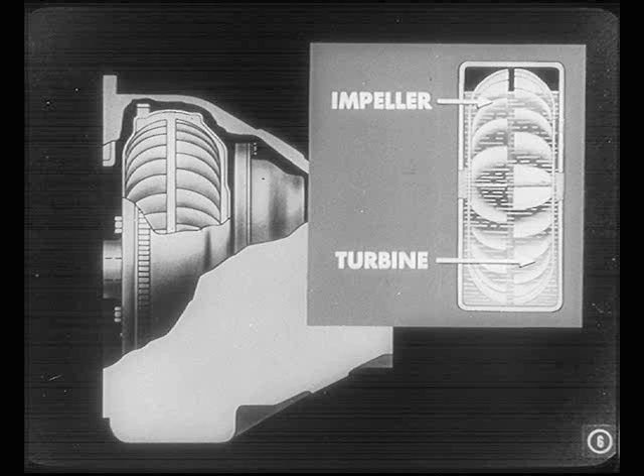You know it has a driving member called an impeller and a driven member called a turbine. Both work in an enclosed oil bath. Well, I know that, Ed. Those two units of the fluid drive work like a couple of electric fans placed face to face, with one of them plugged into an electrical outlet.

That's the idea. One fan blows, the second fan turns with the airstream from the first fan. It transmits power without gears. That's the principle behind fluid drive.

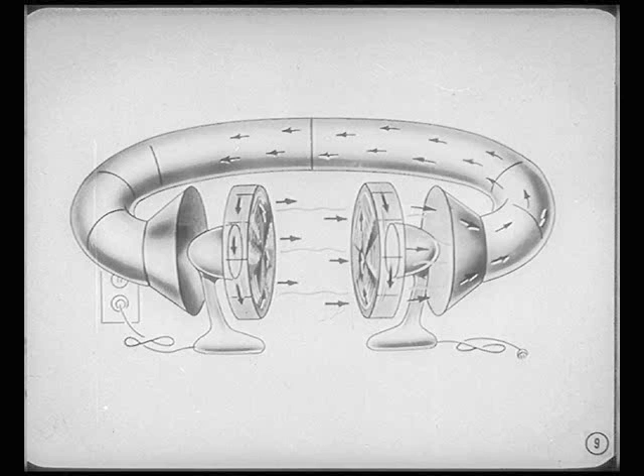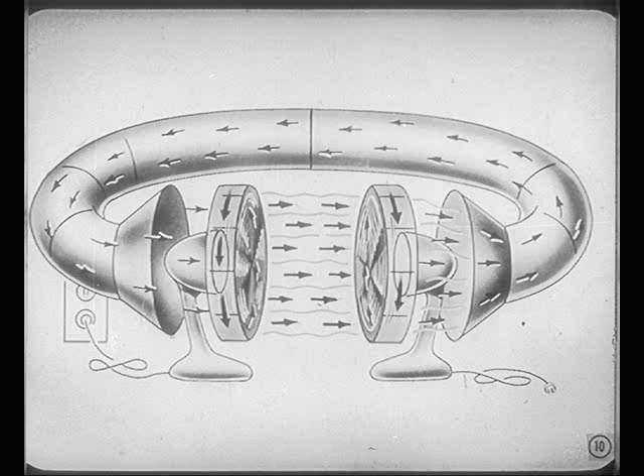Now, suppose you grab the air that's normally wasted as it leaves the second fan. That air's still got a lot of push in it, and suppose you piped it back to the first fan, so it would blow against the blades of that fan so as to help the motor driving it. The fan would then blow more air than it normally would with just the motor driving it.

Since the second fan would have more air blown against it, it would show more turning effort than the motor puts into the first fan. That's torque multiplication, or conversion.

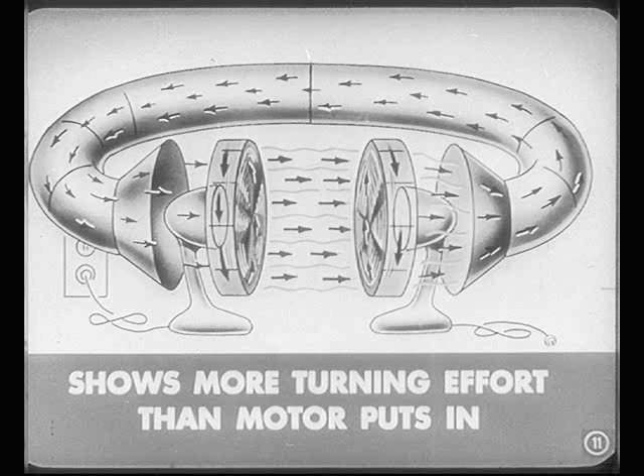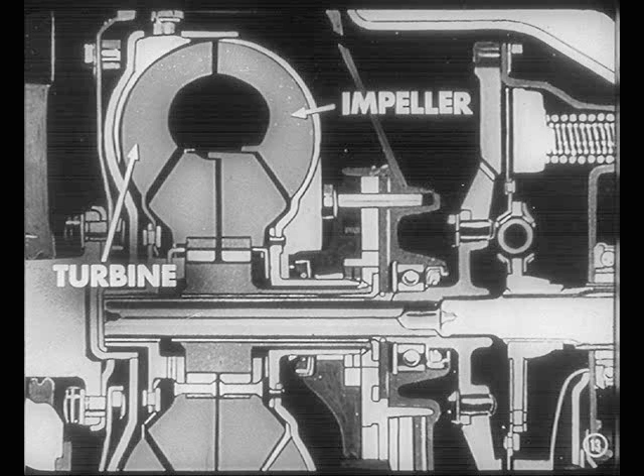I see. Fine. Now, getting torque multiplication from a torque converter just means recirculating the oil to get all the use out of it. You see, Al, after oil from the driving impeller forces the turbine around, it surges back toward the impeller. The oil has a lot of push left in it, and where the torque converter differs from fluid drive is in these two stators, or guide wheels, assembled between the impeller and turbine right at the hub.

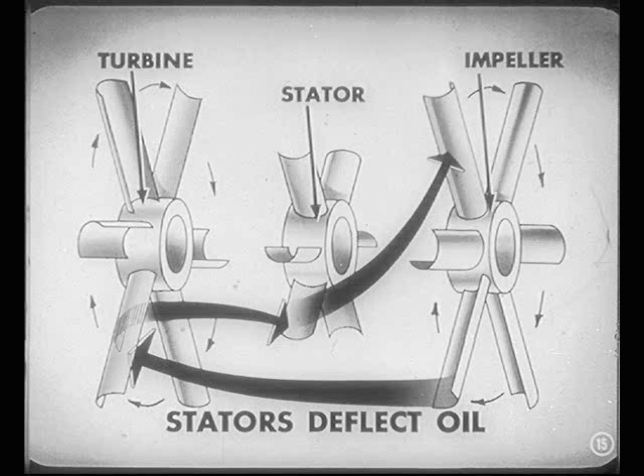They return oil from the turbine to the impeller, as in the case of the pipe with the two fans. I see. The stators deflect the oil coming off the turbine back into the impeller. Yeah, and said another way, the stators redirect the oil so it gives a helping hand to the impeller.

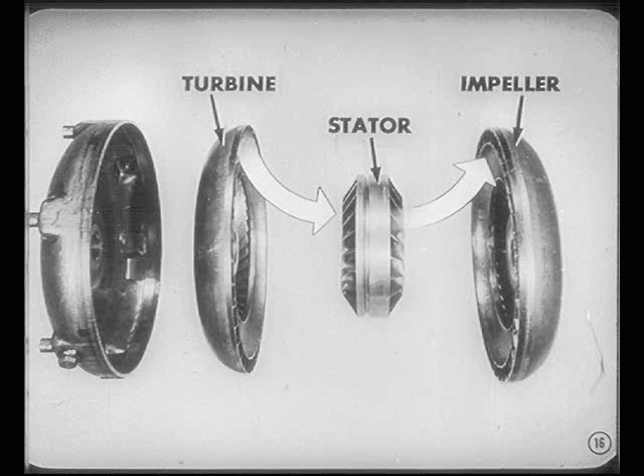The oil fed back to the impeller adds torque to the engine torque, which results in multiplication. Actually, Al, the converter multiplies turning force up to 2 1/3 times.

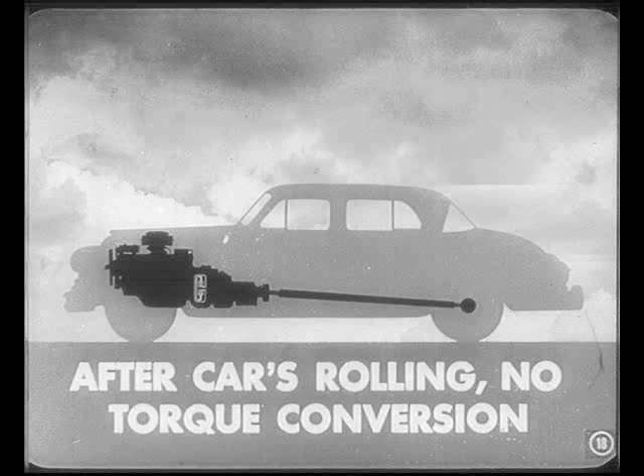Yes, sirree. And the converter delivers extra torque whenever the car needs it, under a heavy load, like up a steep incline. Once the car is rolling under a constant speed, no load condition, there's no torque conversion. The unit runs at about a 1-to-1 ratio, like you'd get with a direct mechanical drive.

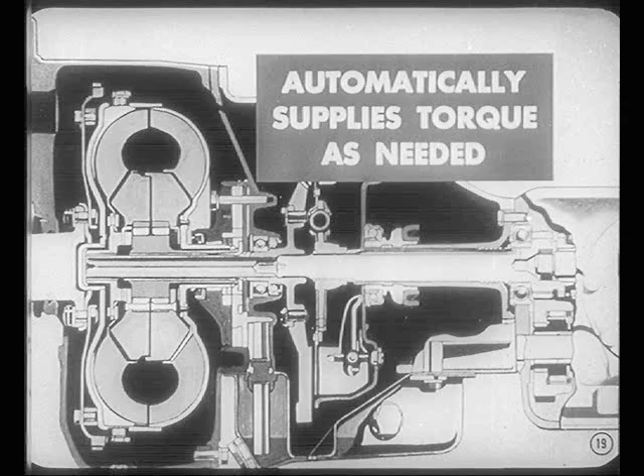Right, Ed. And Al, in between those extremes, the converter automatically supplies the proper torque as needed, depending on speed, grade, throttle opening, and so on. And not only that, fellas, but you get an automatic, smooth, flexible drive like you'd get if millions of small, progressive gear shifts were possible.

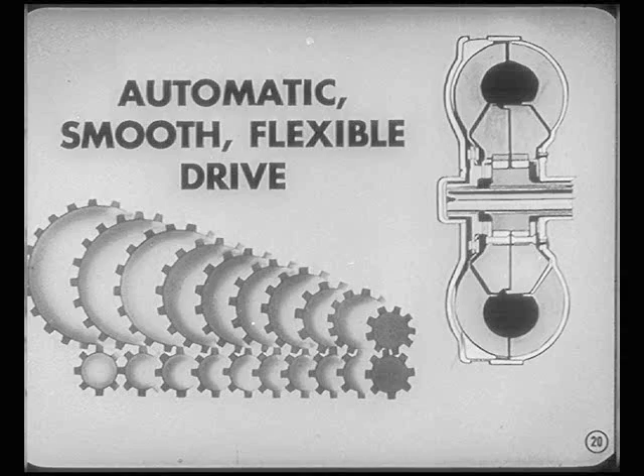That's pretty clear, Ed. But what about the converter oil pump? The one that's in the support plate? Well, that pump does two jobs, Al. It keeps the converter full of oil under a pressure of about 30 pounds.

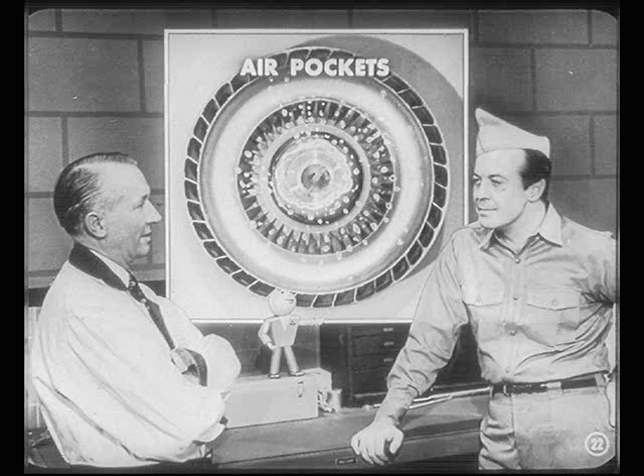Pressure is necessary to prevent cavitation and noise. Cavitation is a $5 word for air pockets or bubbles getting into the converter to upset the flow of oil in a noisy, inefficient way.

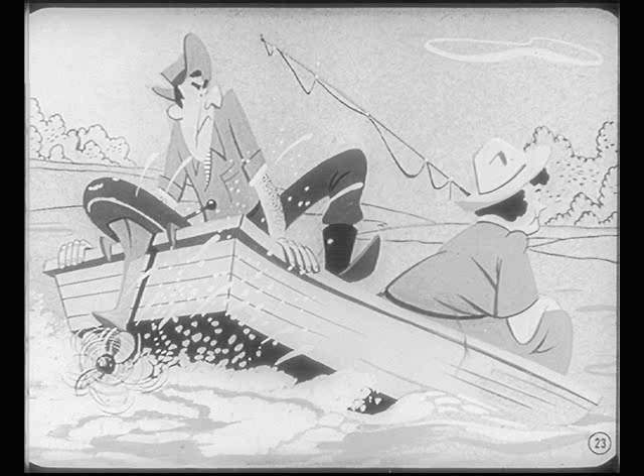Right. It's something like the prop on an outboard motor. When it grabs air, the prop spins fast and the boat doesn't move. I get you, Ed. Fine.

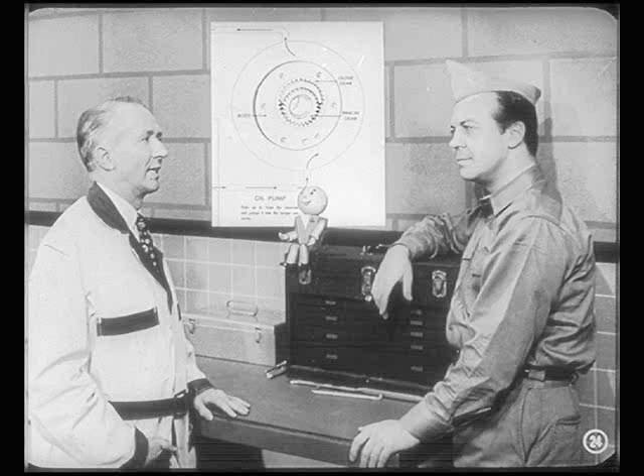Now, secondly, the pump circulates the oil to keep it cool. Cooling is necessary because the converter oil runs at a higher temperature than oil in a fluid drive.

You better show Al how the oil circulates. Ah, that's a good idea. Here's a sketch showing oil circulation. See?

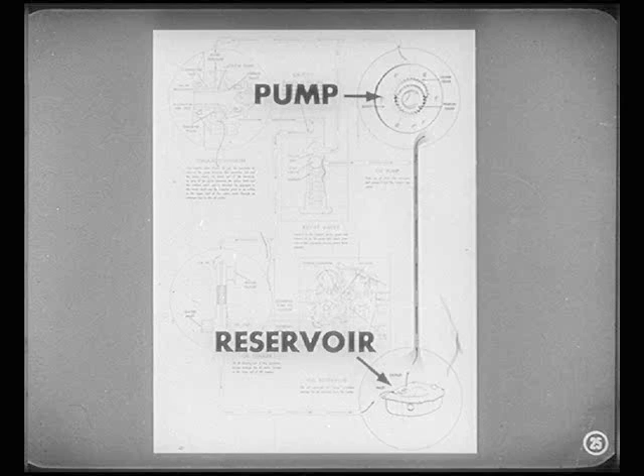There's the pump drawing oil up from the reservoir. The pump then pushes oil under pressure into the converter. That oil enters the converter through a clearance between the converter hub and stator shaft. The oil leaves the converter through the clearance between the stator shaft and the turbine shaft. It enters a transfer plate passage, which directs the oil through an orifice in the relief valve body and into the external line to the cooler.

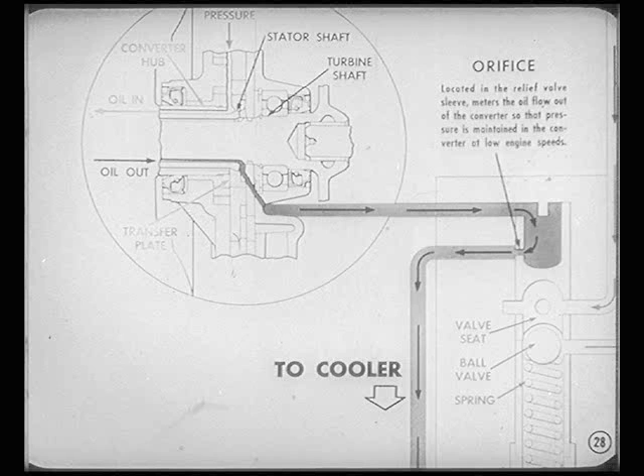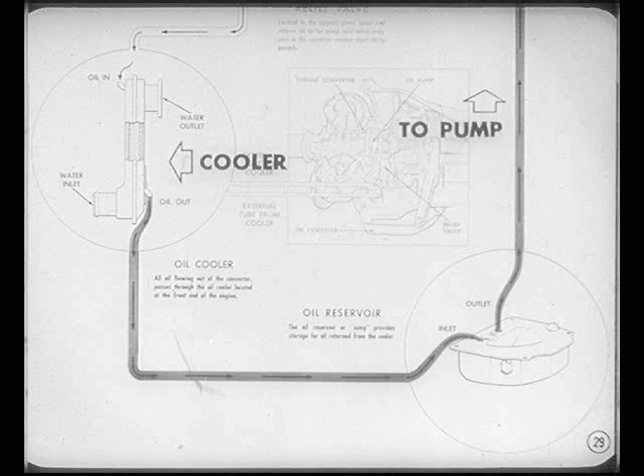The orifice backs up the oil when the pump turns slowly. That helps maintain pressure in the converter at idling speed. From the cooler, a line carries the cooled oil back to the reservoir, where the pump picks it up for the converter. Where's that cooler at, Ed?

Near the front of the engine, Al. Water from the engine circulates through passages in the cooler. In addition, the cooler benefits from the fan blast. And here are those lines from the pump and reservoir to the cooler.

I see. Now, what happens when pressure builds up in the converter? Why, this pressure relief valve moves off its seat and returns oil to the inlet side of the pump. Those oil pump jobs sure look important.

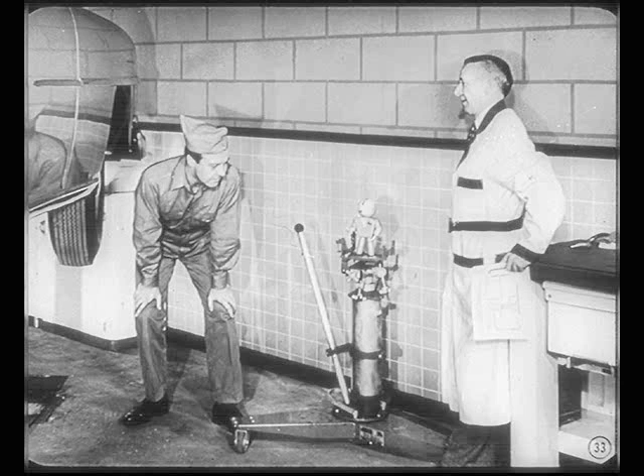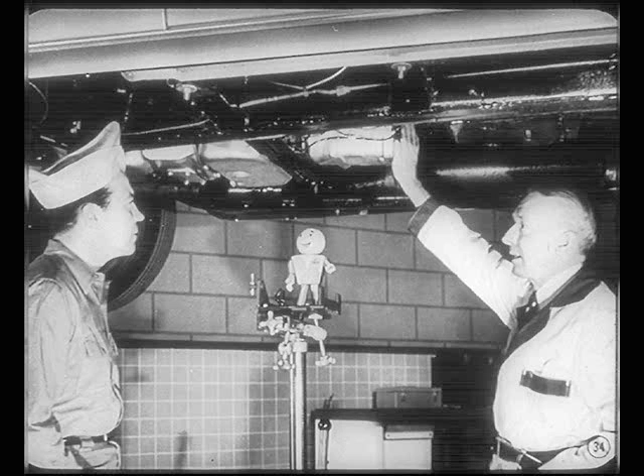That's why we've got to look the pump over carefully. Righto, Tech. So, getting back to the pump condition on this job, we've got to pull the transmission, clutch housing, the clutch assembly, and the converter support plate.

Right, Ed. And Al, you want to watch a couple of things. First, you drain the reservoir. Then remove it from the clutch housing. Don't drain the torque converter yet. It's easier to do later, and you won't dump that hot oil in your lap.

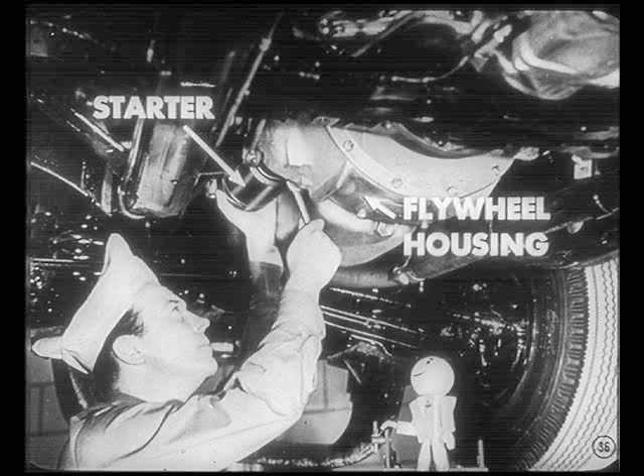Good point, Tech. After the reservoir's off, I suppose you take off the starter and the lower half of the flywheel housing. Yeah, Al. And then's the time to drain the converter. Turn it so one drain plug's at the bottom and remove the plug. After draining, reinstall and tighten the plug so dripping oil won't burn you.

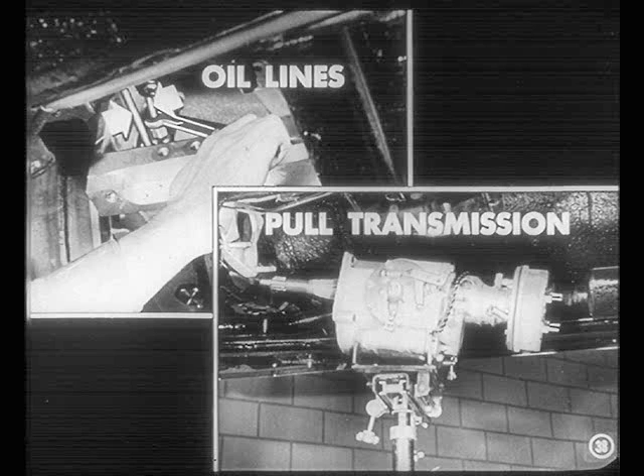Now, we'll disconnect the oil lines from the rear of the support plate. Next, pull the transmission. Okay, I'll get right on it.

Now, because the rear engine mounts are on the clutch housing, you'd better use this special tool. It hooks into holes in the frame side rails and supports the engine when you remove the clutch housing.

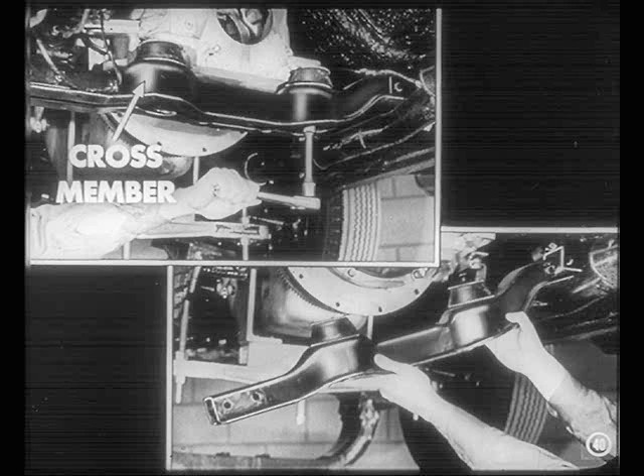Now, to remove the crossmember, first remove the rear engine mount bolts and raise the engine slightly. That'll take the weight off while you remove the crossmember bolts and drop the crossmember.

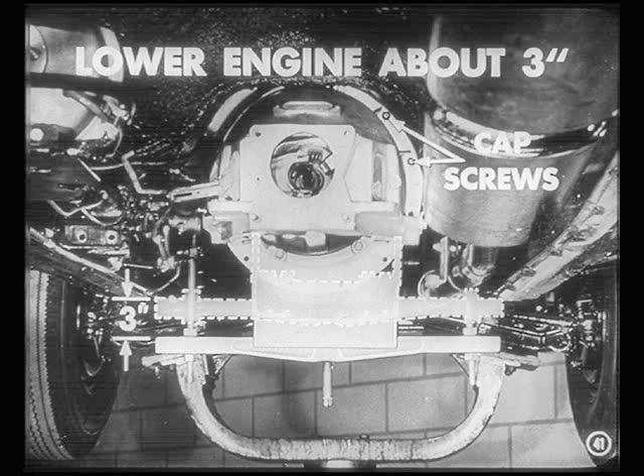Next, lower the engine about 3 inches so you can get a wrench on the cap screws at the upper part of the clutch housing. Remove the housing attaching screws and remove the clutch housing. Then take out the clutch.

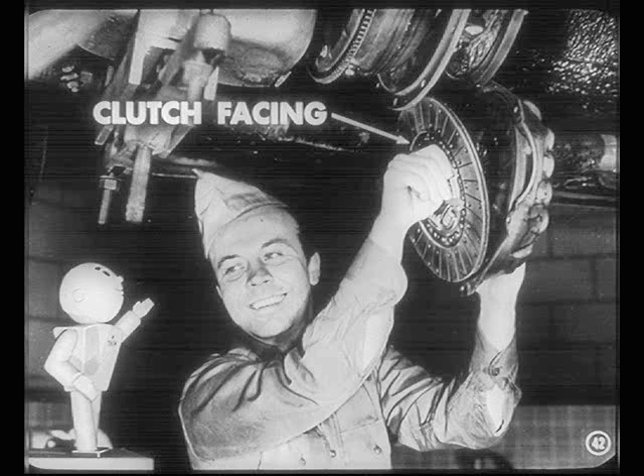Yeah, Al. And keep your greasy fingers off those clutch facings. Don't worry, Tech. I'll watch that.

Swell. Now, pull out the converter support plate with the clutch driving plate attached and put it on the bench. Then we'll take the oil pump out of the support plate.

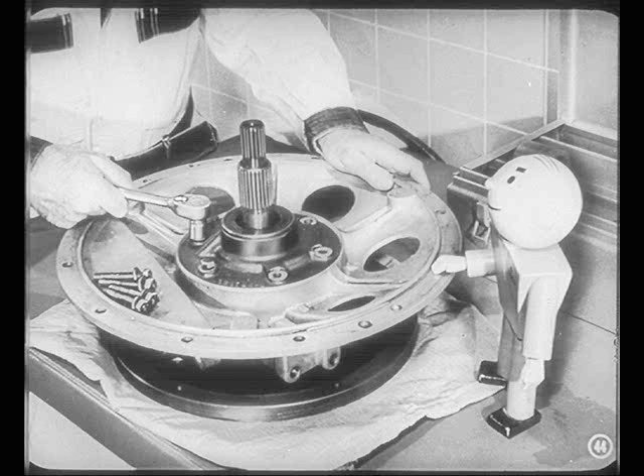Now, to get the pump out, you first remove the 6 screws holding the body to the support plate. 2 of the holes are threaded. That's so you can use 2 special puller screws to pull the pump body out evenly.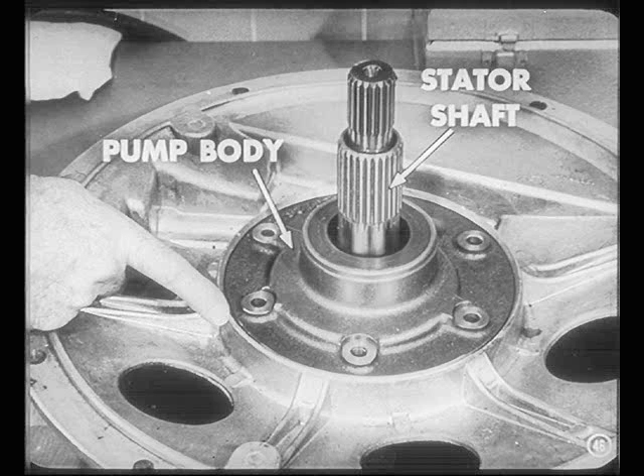But before you can do that, we have to heat the support plate. That expands it enough to permit removal of the pump body and stator shaft without scoring the inner surface of the pump recess. A scored recess can cause an oil leak.

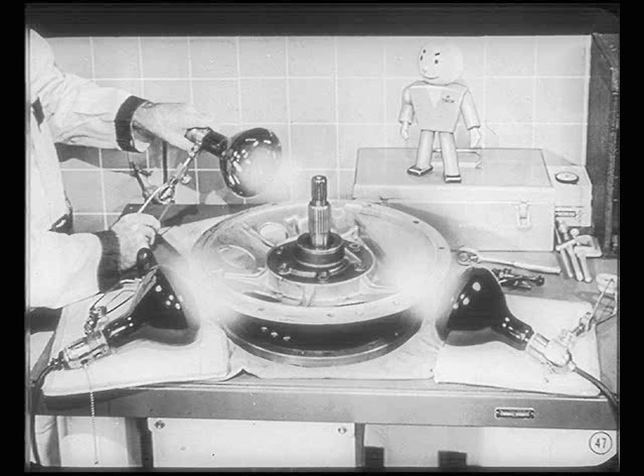One safe way to heat the plate is to use 3 or 4 ordinary heat lamps around the outer edge. A blowtorch can be used if you move it around carefully to spread the heat over the entire support plate and not just around the pump recess.

How long is it going to take to expand that plate with those heat lamps? Oh, about 15 or 20 minutes. Just warm it up so it's hot to the touch.

Say, while that support plate's warming up, somebody better turn this record over.

While that support plate's getting warm, we can be checking hub runout on the converter.

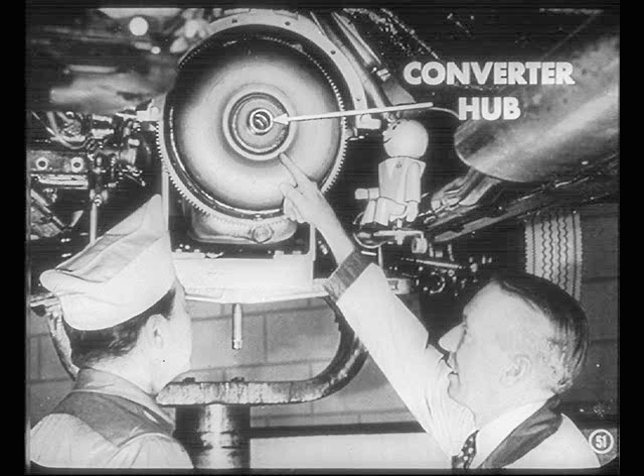Why check that? I thought we were looking for an oil pump noise. We are, Al, but every time you remove the support plate, you should check converter hub runout before you reinstall it. I see, one of those always-check jobs. Okay, what do we do first?

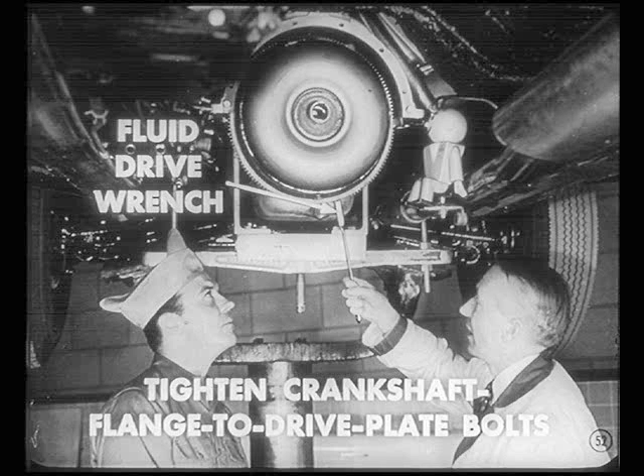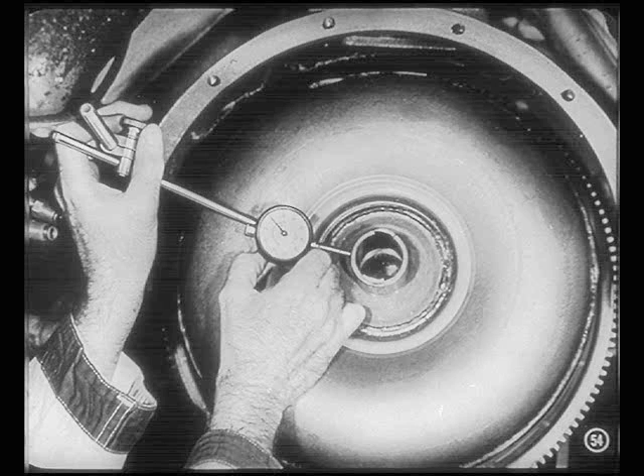First, we use a fluid drive wrench to tighten the crankshaft flange-to-drive-plate bolts. Then we use a torque wrench and tighten the 6 drive plate to converter bolts to 17 foot-pounds. Next, mount a dial indicator in either of the lower holes of the clutch housing flange. Line up the indicator follower at right angles to the hub, about a quarter inch from the base of the driving lugs. Use a screwdriver between the crankshaft flange nuts to turn the engine. Removing spark plugs lets you turn the engine easier.

If runout exceeds 5 thousandths, chalk the spot where the runout's the highest. Bring that chalk mark around to the gauge. You understand that so far? Still with you, Ed. Carry on.

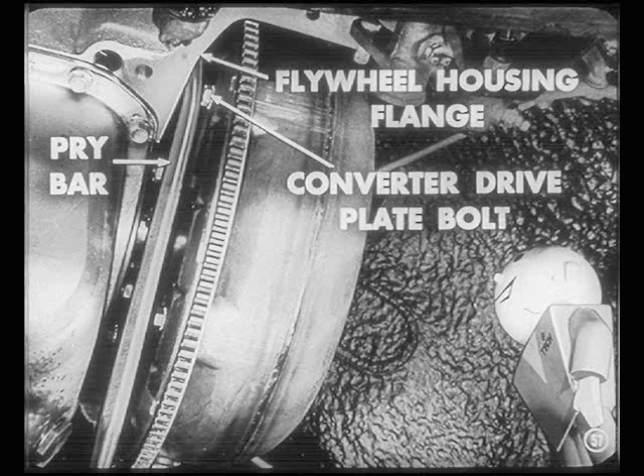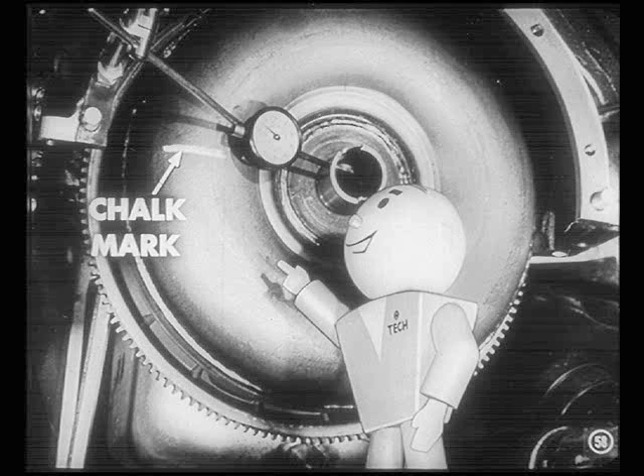Good. Now, to correct excessive runout, put a pry bar between the flywheel housing flange and against the head of the nearest converter drive plate bolt. Position the converter slightly to use this bolt head as a fulcrum. Then spring the plate away from the engine. Be sure you pry on the side of the housing with the dial indicator, close to the chalk mark.

Right, spring the drive plate about 1/8 of an inch to change hub alignment a few thousandths. After springing it, read the indicator again. Repeat this operation until the hub is within 5 thousandths runout.

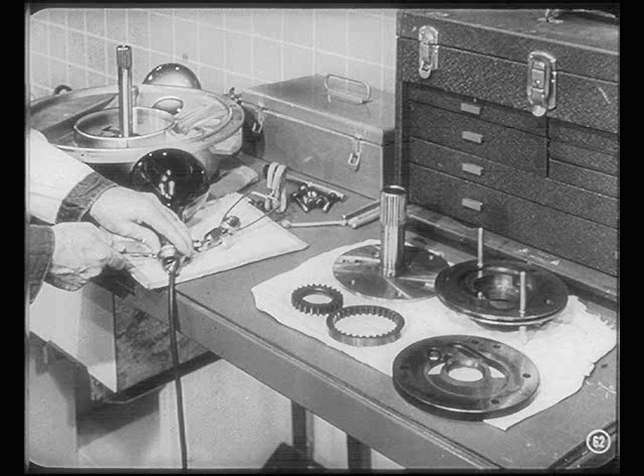Correct, Tech. Once the pump body and gears are out, turn the heat lamps on to keep the support plate warm. Then we can inspect the pump parts and seals. It's always smart to inspect the turbine shaft oil seal ring. If it's broken, replace it. Will you take a look at that?

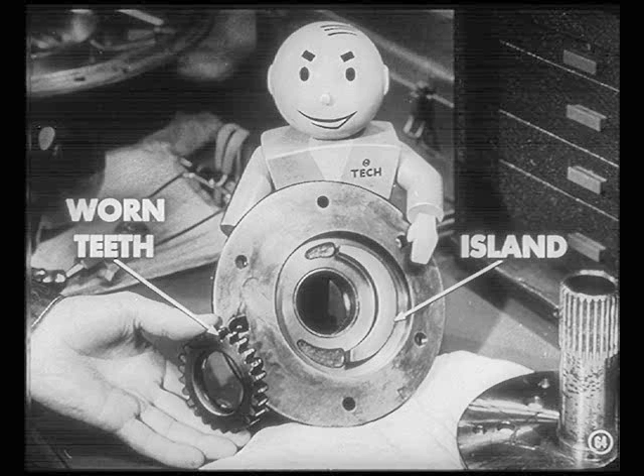The ends of the pinion gear teeth are worn from rubbing against that pump body island. I suspected that from the noise the pump made. How'd it sound, Ed? Oh, like a boy running a stick along a picket fence. I heard it when the car was in neutral and in gear. It sometimes whined because it increased in pitch as engine speed increased.

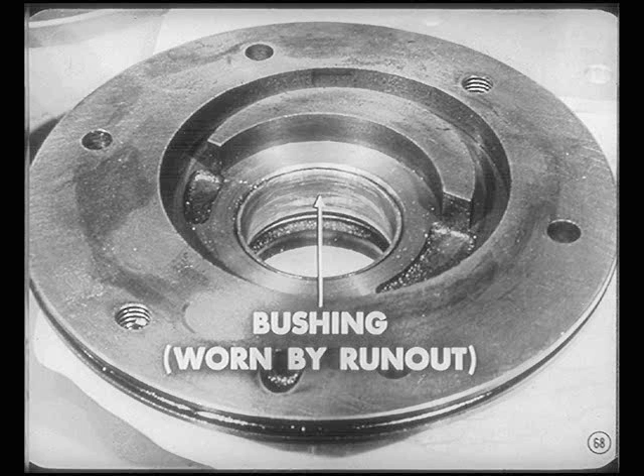Pretty clear, Ed, and that condition was caused by the converter hub's excessive runout. Right. Runout's okay now, so let's fix the pump. First of all, we'll replace the pump body and pinion gear. Anything special about that? Well, a new pump body is needed because the bushing in the old one was worn by the runout.

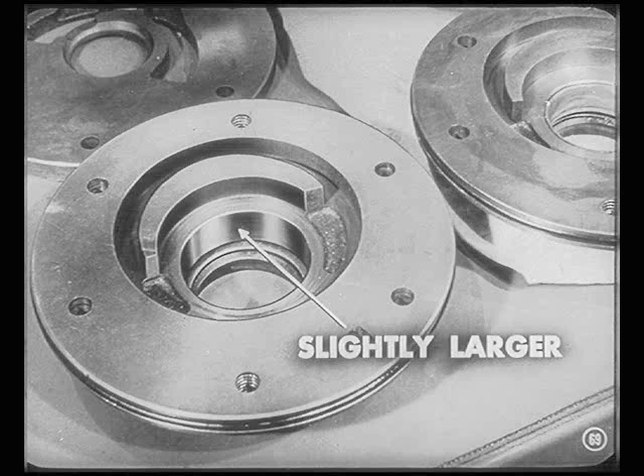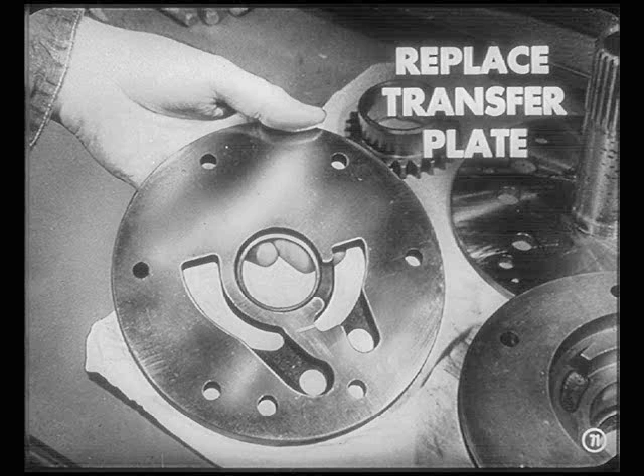You'll notice the new pump body bore is slightly larger and doesn't use a bushing. That's because the new pump pinion is an oilite gear with a pilot hub to control clearance between the pinion gear teeth and island. The oilite gear doesn't require a bushing. Besides that, we'll replace the transfer plate because of a slight change in design. You'll find this new transfer plate, along with the other parts you'll need, in the parts package supplied for this repair.

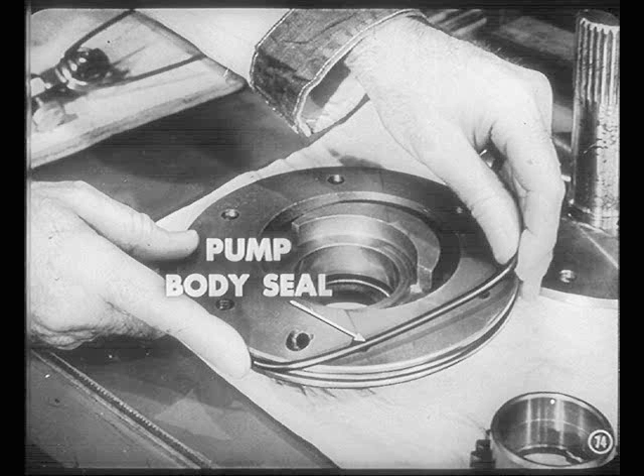I see, Ed, now what's next? Well, this support plate recess shows no scoring that could cause oil to leak past the pump body seal, so let's reassemble the pump. You begin that by cleaning all of the pump parts carefully. Then, always use a new pump body seal.

Finally, install the gears. At that point, Al, use the transfer plate as a straight edge and a feeler gauge to see if there's 1 to 3 thousandths clearance between the pump body and gears. All right, Tech, this one's okay.

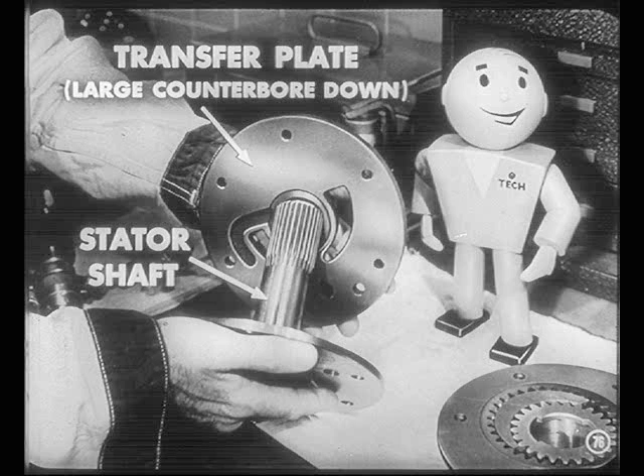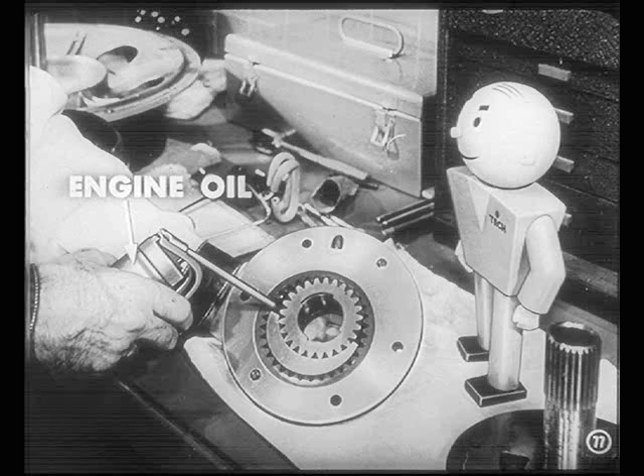Fine. Now you can install the transfer plate with its large counterbore down over the stator shaft. Right. Then, holding the pump body by the hub, pour a little oil between the gear teeth for initial lubrication and to prime the pump.

Following that, invert the stator shaft and transfer plate and install them in the pump body. Invert the pump and line up the holes.

This support plate's hot. Shall I turn off the lamps? Yeah, Al. Then we'll install the pump.

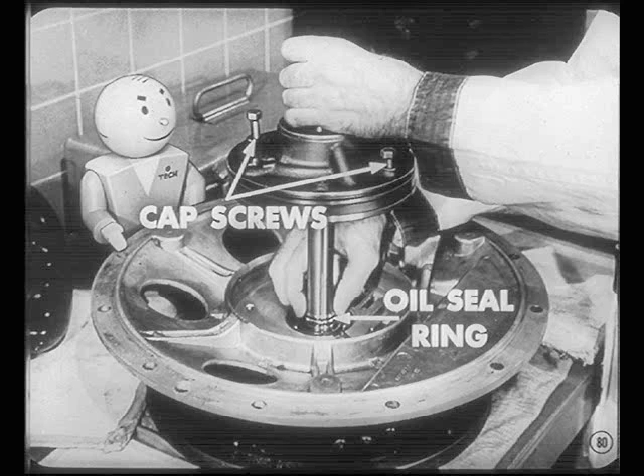Use 2 cap screws to keep the holes in line. Center the turbine shaft oil seal ring so you won't break it, and ease the pump into the recess. Use new copper gaskets and tighten the body screws alternately. Torque them all to 17 foot-pounds, and you're ready to reassemble the converter.

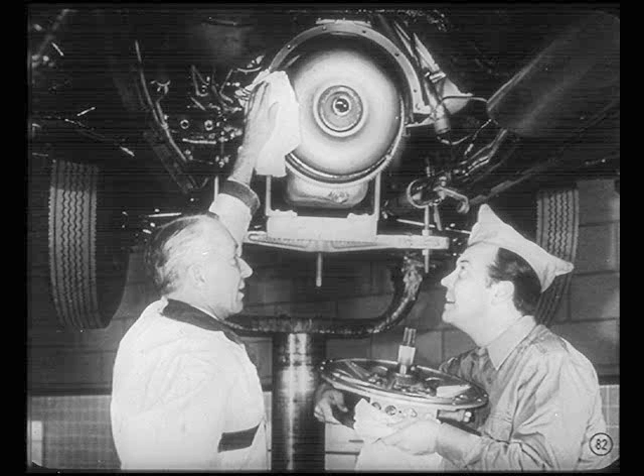First, see that both the mating surfaces of the support plate, as well as the flywheel and clutch housing flanges, are clean and free from burrs. I see. You got to have 4 clean surfaces.

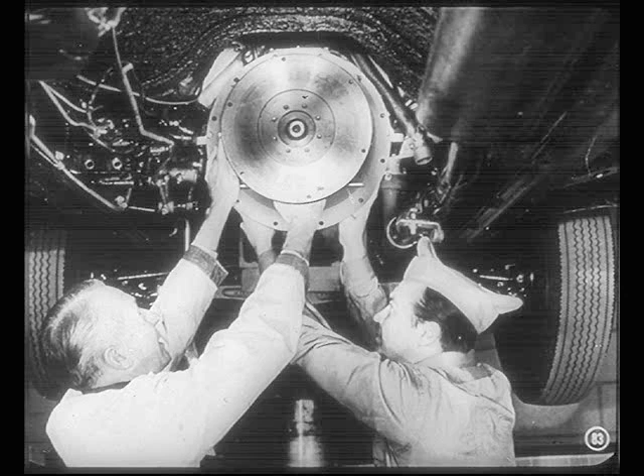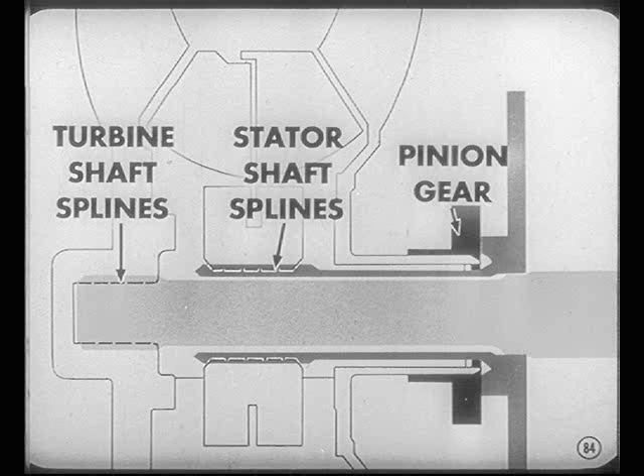Right. Now, while I hold the support plate, turn the converter slowly. There are 3 different points we've got to index. First, the splines into the turbine. Second, the stator shaft splines have to engage the stator hub. Third, the drive lugs have to engage the slots in the oil pump pinion gear.

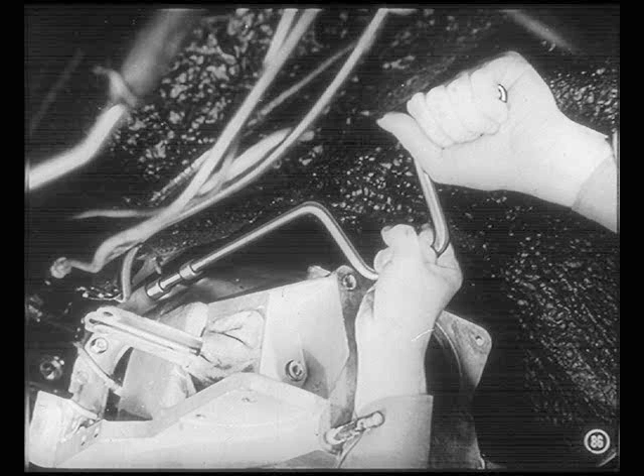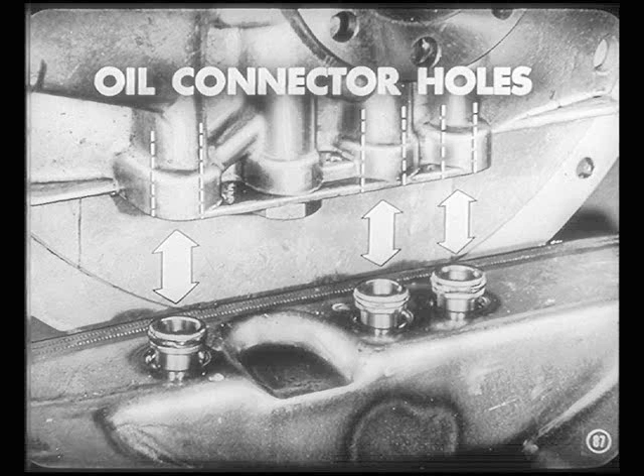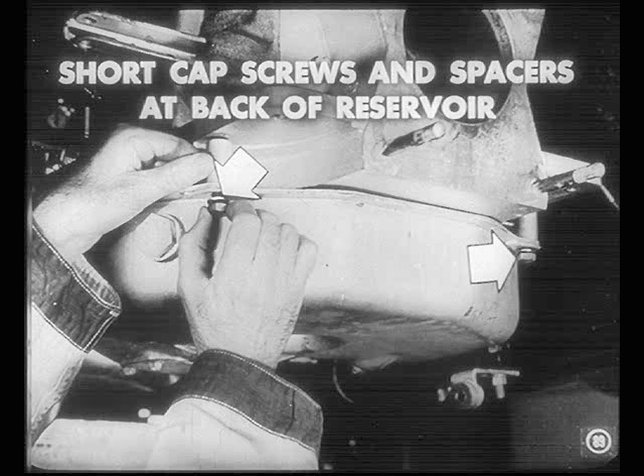Okay. Anything else? Well, make sure the oil connector holes in the support plate and reservoir are clean and free from burrs. And you'd better use 2 new seals on each of the 3 oil connectors before installing the reservoir. Grease the seals a little and put them in. When you install the reservoir, use the 2 short cap screws and spacers at the back end of the reservoir.

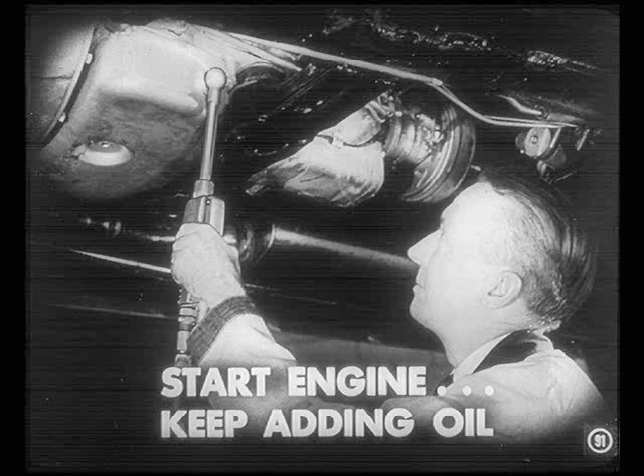Will do, Ed. Another thing, after you've got everything back together, you're ready to fill the converter. Remove the reservoir filler plug and add the recommended oil to the level of the hole. Put the transmission in neutral, start the engine, and run it at 500 to 600 RPM. Keep adding oil until the level remains at the bottom of the hole.

Total capacity is about 10.5 quarts. Then replace the filler plug.

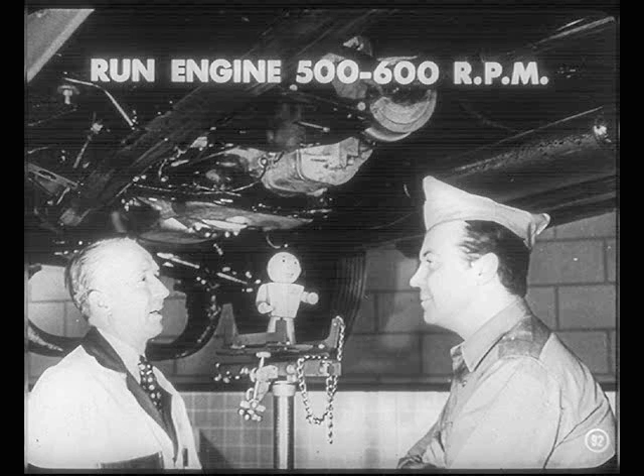After that, shift the transmission into high range. Run the engine briefly at 500 to 600 RPM. That eliminates any trapped air, and you can check for external leaks at the same time. Then inspect the level of fluid once more.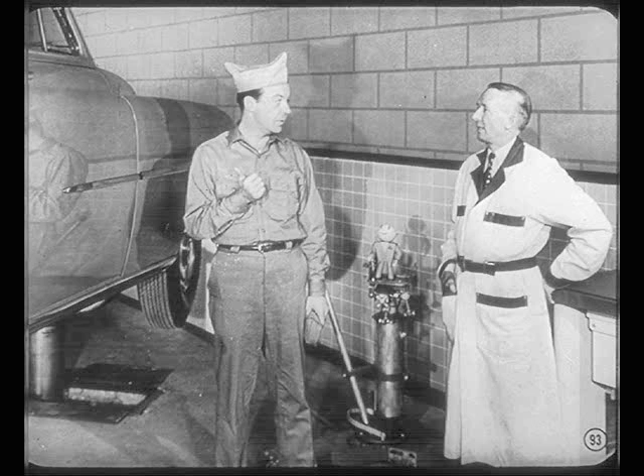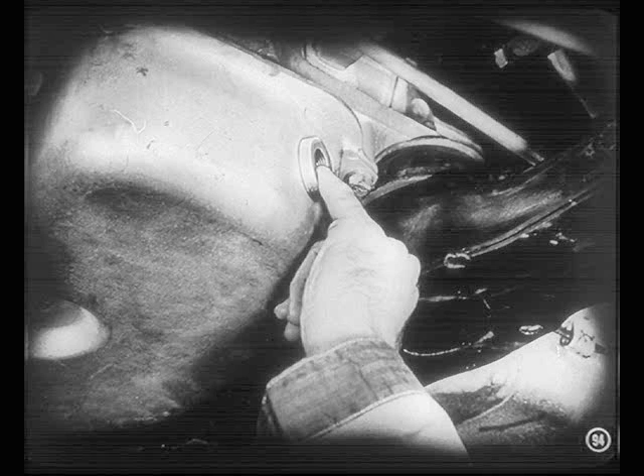Okay, Tech. Once that's done, I suppose it's wise to road test the job, eh? Yeah, that can be a further check on oil leaks, too. After the road test, run the car up on the hoist and check the oil level. If it's okay, there are no leaks.

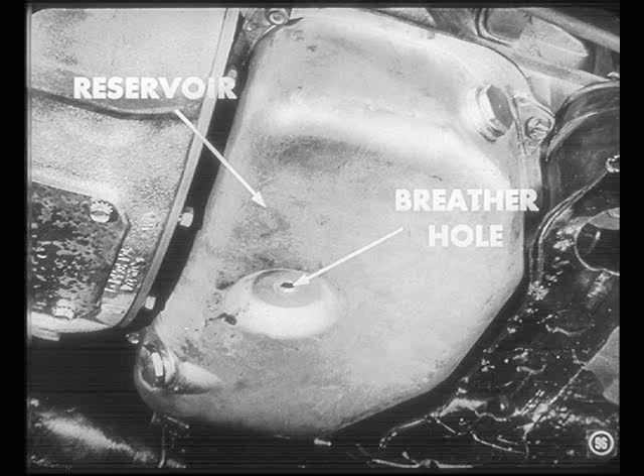Where would you look for leaks if the level was low? Why, at the oil lines and fittings on the left side of the support plate first. Next, I'd look for signs of leaks at the reservoir. If a connector seal was damaged, oil would leak into the hollow of the reservoir and drip through the breather hole in the bottom. Replace the seals each time you remove a connector.

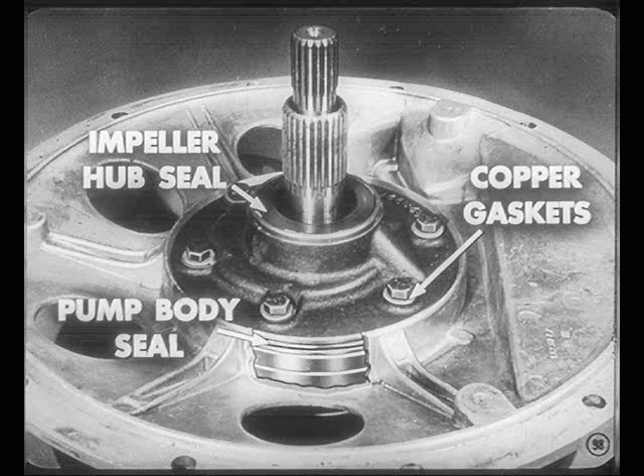Okay. Any other possibilities? Well, a leak on the rear side of the support plate usually means the turbine shaft oil seal's at fault. Oil on the front of the support plate can point to the impeller hub seal, the pump body seal, or the copper gaskets. Say, no wonder we use new seals at all those points.

Here's something else, Al. This reference book contains a lot of good service tips on the torque converter. Be sure to look it over. Okay, Tech, will do. Fine, Al.

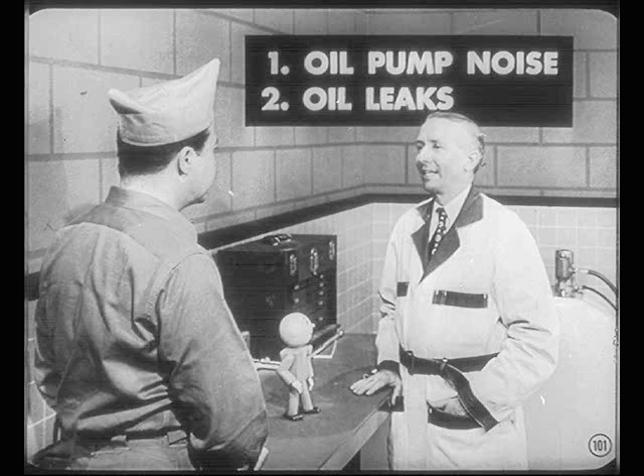Actually, converter servicing is fairly simple. The sealed unit's just about trouble-free. If you ever run into one that's not up to snuff, the only thing you can do is replace it. In addition, the converter oil pump might occasionally sound off. You can fix it, just like we fixed this one. The only other conditions are oil leaks, which call for replacing seals.

Well, that about covers converters. Yeah, Al. Just go at the job as carefully as you and Ed did, and you'll have no worries about servicing torque converters.